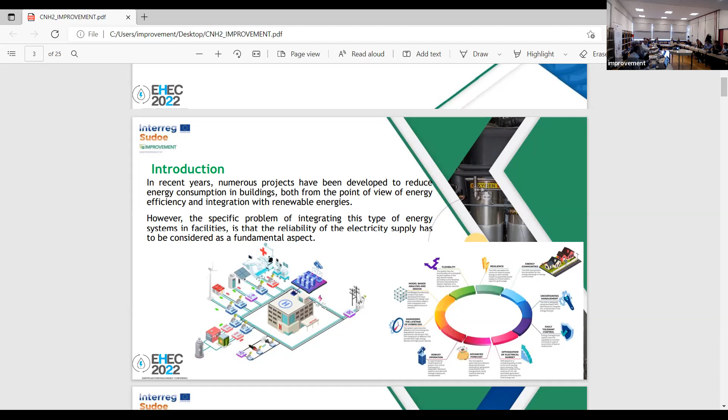We will have an introduction. In recent years there have been numerous projects because it's very important to reduce energy consumption in buildings. For this reason, Interreg Sudoe decided to have a call on how the consortium could have ideas in projects and collaboration projects in order to reduce and improve energy efficiency. This is the reason we have tried to solve with this project.

There are some places where we can find a lot of energy losses - for example, for health reasons in hospitals, in scientific and technology centers and universities, in defense conditions such as military installations, security and surveillance, in transport stations and airports. These are public kinds of buildings where we detected that we could find solutions with this project.

Why the solution? In order to reduce the consumption of energy and to improve efficiency, the main objective of the Improvement project is to convert public buildings into zero energy buildings.

By integrating renewable energy microgrids with combined heat, cooling, and power generation, with inverters, with active neutral control using hybrid energy storage systems like hydrogen, batteries, and ultracapacitors, that will ensure power quality and continuity of service to equipment sensitive to power quality disturbances - high-tech equipment - while increasing energy efficiency in this type of building.

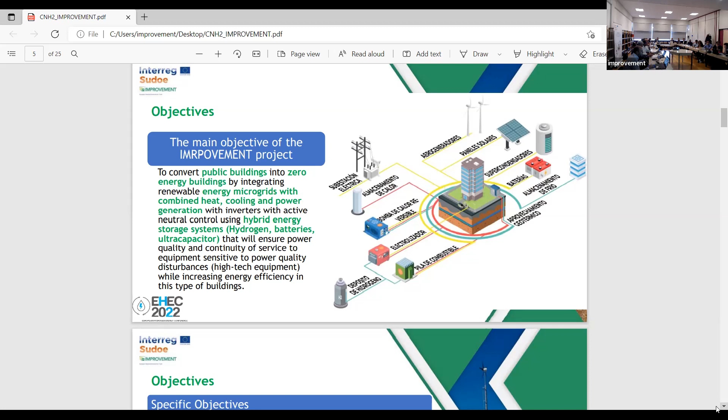For this reason, this is the specific objective: improve energy efficiency in public buildings with active and passive techniques, like here in this building, in this pilot plant, this building from LNEG in Lisbon.

Development of a resilient power control system of microgrids under high quality design criteria and continuity of supply. Development of an energy management system for renewable generation microgrids with a hybrid energy storage system, under criteria of minimum degradation, maximum efficiency, and priority in the use of renewable energy.

It is very important to use innovative technologies and techniques in pilot plants to demonstrate that the technology is possible and can achieve the goals that the government or the buildings need.

And also the energy management system, with a series of techniques - control predictive, in the development of algorithms, something like that - we can use it in order to optimize the use of energy in the buildings.

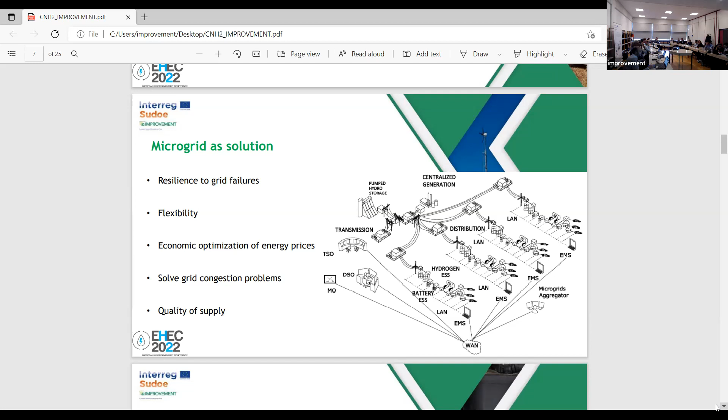There is a power management system - mainly in the Spanish pilot plant, we have used the inclusion of IoT sensors in power quality advanced metering infrastructure. We are going to develop this kind of sensor in this project and test it in the Spanish pilot plant.

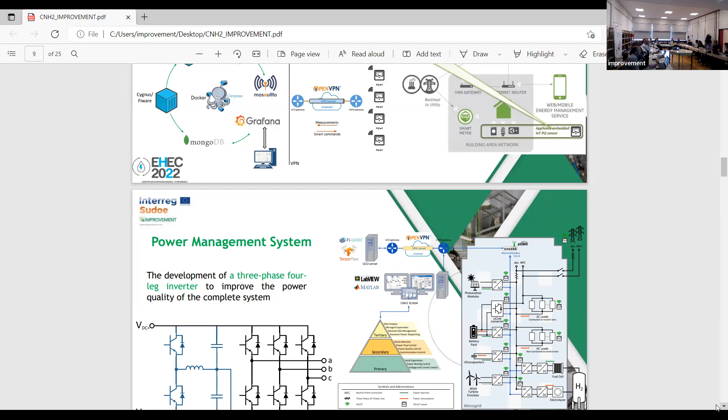Also, we are going to develop a three-phase four-leg inverter to improve power quality and complete the system. This is another technology we are going to test in the Spanish pilot.

Also, the energy management system - we are going to have different uses of this system in the Portuguese pilot and in the Spanish pilot. In the Portuguese pilot, we have solar collectors, a hot water tank, thermal energy storage, a heat pump, fan coil units, for specific rooms. The objective is to manage thermal energy and satisfy the thermal comfort constraints.

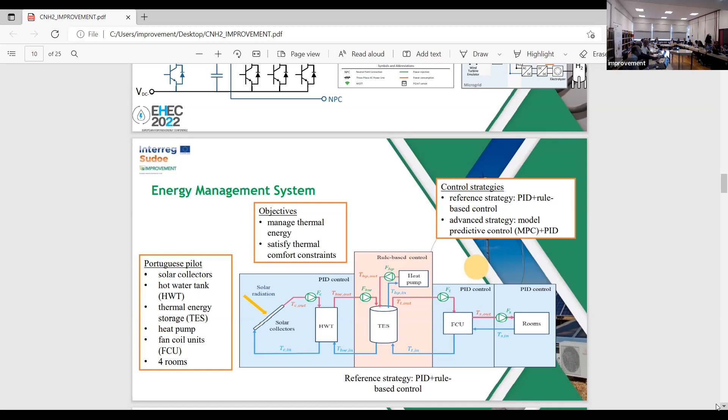And also they are going to use control strategies in order to achieve this solution, with PID plus rule-based control, or advanced strategy using model predictive control.

We are going to work on these algorithms in order to obtain a resilience-oriented schedule of the microgrids.

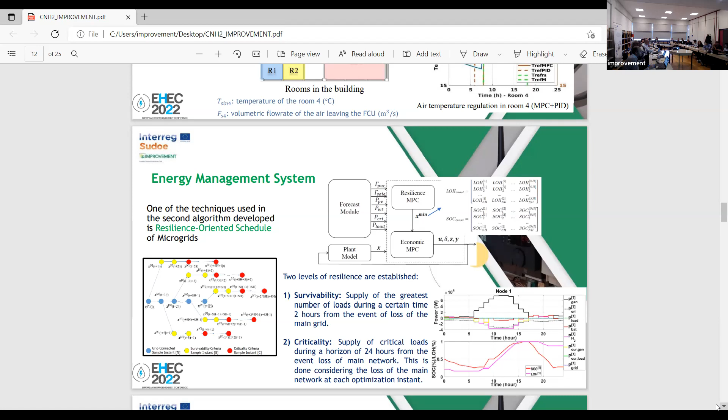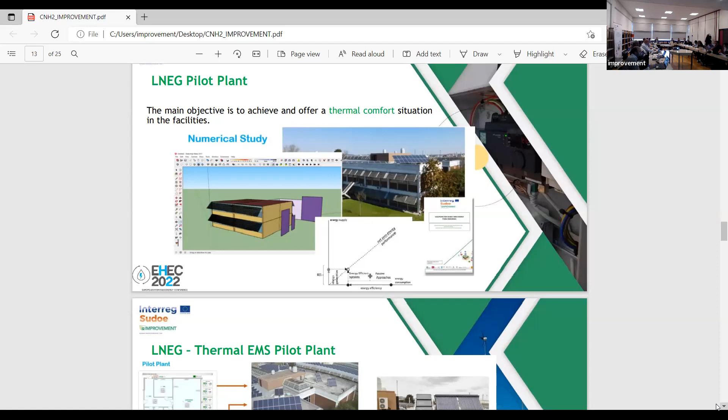In the LNEG pilot plant, the main objective is to achieve and offer a thermal comfort situation in facilities. Maybe after we are going to talk more about the pilot plant, but the idea this morning was working about the pilots that we have developed, and we are working in this project about the LNEG installation facilities. We have some images and pictures that you can see. If you want more information, you can see the Sudoe project web page.

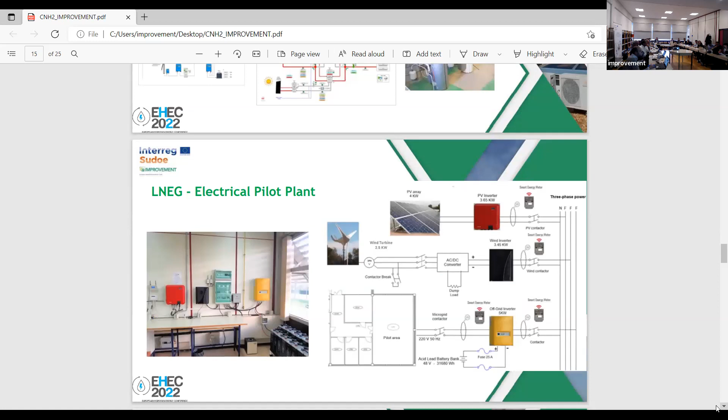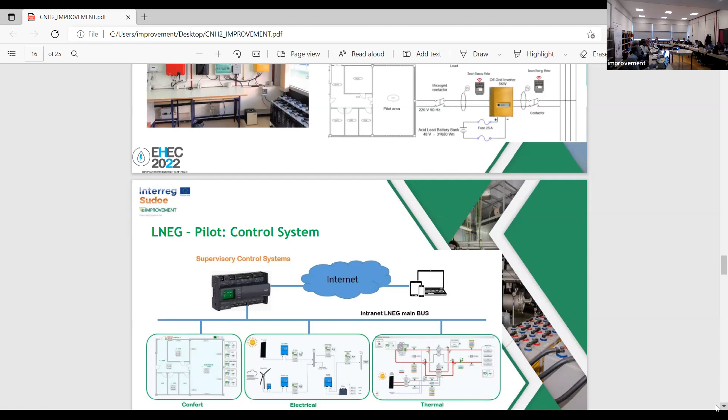I only want to show some information, since my colleagues know better than me about the technology, the techniques that they are using in the pilot plant, the electrical pilot plants, the control system they are using, and the results. We expect very relevant results by the end of the project to share with the public.

About the pilot plant in the Spanish National Hydrogen Center in Puertollano, Ciudad Real, Spain - we are using different technologies. We also have renewable energies. We have a small wind emulator, and we have hydrogen equipment to use it.

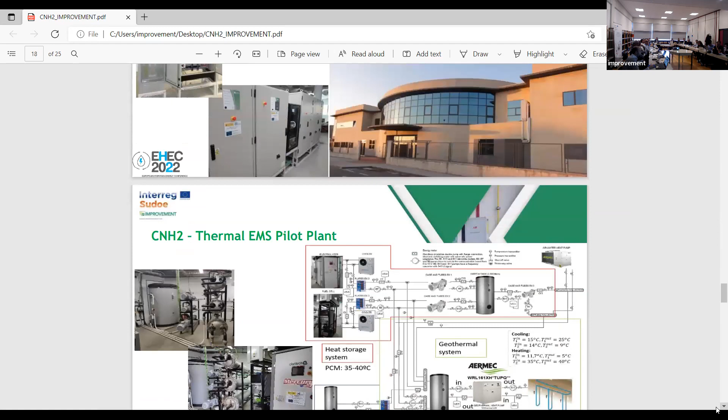We have a geothermal installation that lets us use the heat or cold from inside the earth, and we use this heat together with the residual heat from the electrolyzer and fuel cell equipment in the pilot plant, storing it in PCMs, phase change materials, in order to use this heat when we want to supply the thermal demands.

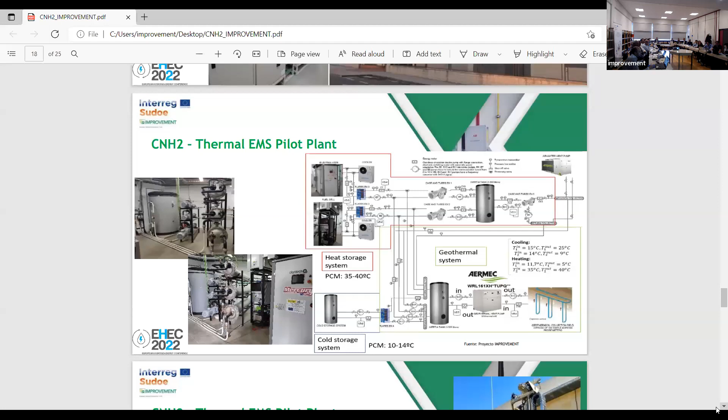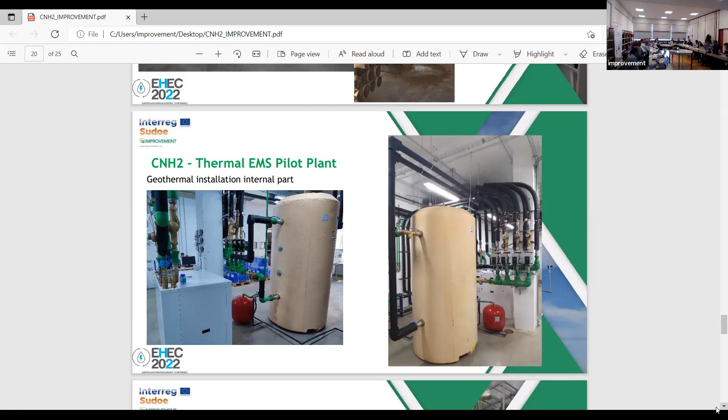In the building, we have the geothermal installation in the internal part. We can see the inertial tank and the geothermal pump that we use in order to operate the thermal system.

We have a cold energy storage system too, and there is the installation of the heat energy storage system. This is the electrolyzer, this is the fuel cell. You use the geothermal heat and join it with the residual heat of the electrolyzer and fuel cell equipment, and it goes into the tank to be stored with the PCMs, in order to reduce the power consumption of the CNH2 building.

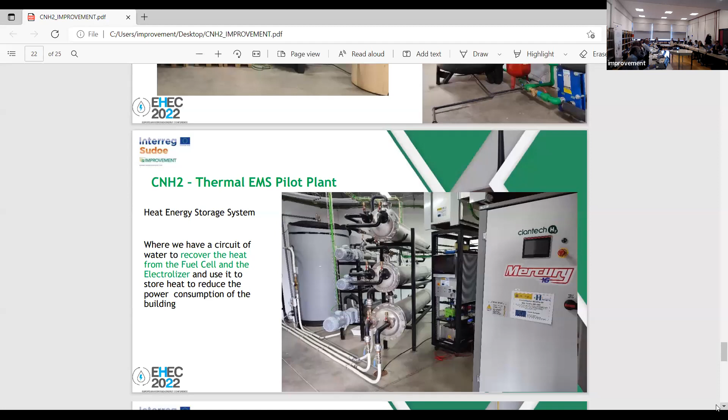We also have a hybrid storage system with batteries, supercapacitors, and hydrogen storage. We can use a microgrid laboratory in order to emulate and simulate this kind of energy storage, and use the pilot plant as a demonstrator that this technology is a fact, to verify the solutions we have.

And I think this is all. I try to go very quickly because what's important is the rest of the presentation that we can see.

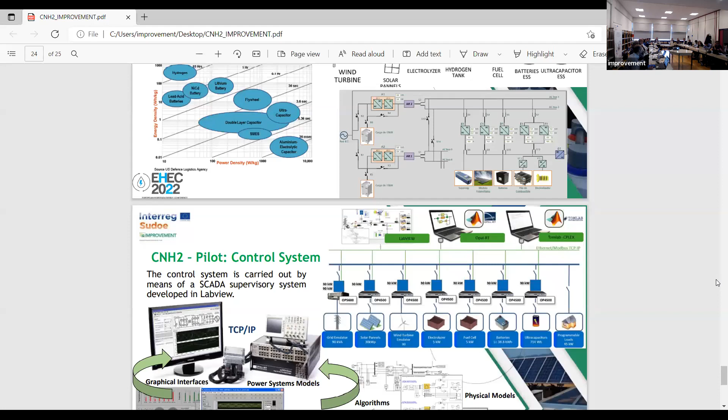Portugal is represented by LNEG and the Lisbon Technical Institute, and in France there are Perpignan University and ESMA. Spanish participation is from CNH2 as coordinator, Córdoba University, Castilla-La Mancha University, the Andalusian Energy Agency, and the Andalusian regional government is also involved in the project, because it's very important to receive the results directly.

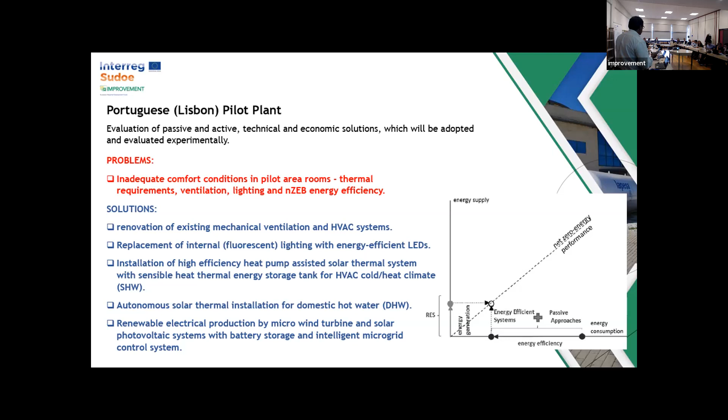Em termos de renovação de edifícios, nós fizemos uma monitorização em 2020, ainda durante o período de pandemia, de como estariam as medidas de temperatura sem renovação, e tivemos aqui a aplicação mais ou menos da ocupação que estamos previsto, aqui os gabinetes individuais, aqui a sala de reuniões e aqui a sala multiusos, de grande utilização. Tivemos aqui uma série de sensores que pusemos para fazer o levantamento inicial da monitorização.

Tivemos necessidade de identificar situações muito particulares que estavam a criar um desconforto e identificámos um ganho de energia solar, de irradiação bastante elevada, que aquecia e não permitia ter conforto. A resistência térmica aqui é muito menor que no resto do edifício, da envolvente, e tivemos também de pensar estratégias que pudessem ser adequadas, quer na zona sul, sudeste, quer na parte norte.

Este é realmente o trabalho que foi preciso fazer para renovar o edifício. O edifício tinha uma instalação muito antiga, não estava a funcionar, estava parada, e então foi necessário remover e voltar a instalar e moldar tetos falsos e instalar, em cada um dos espaços, um sistema adequado à sua utilização variável ou contínua, conforme a situação.

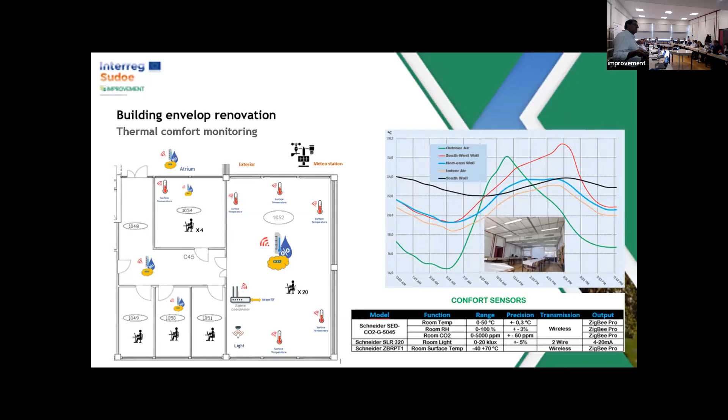Aqui temos os fancoils que foram utilizados, um deles, nesta renovação, e o outro fancoil, que podem ver aqui na sala. Aqui é a instalação na cobertura da componente de bomba de calor, que fornece calor e frio, como vai ser explicado mais tarde, e também da unidade de ventilação, que permite injetar ar novo e fazer a extração do ar viciado aqui da estação.

Esta é a parte mais prática da questão. Nós, inicialmente, usámos dois sistemas distintos pela capacidade de usar este edifício. Ele tinha, inicialmente, uma boa envolvente de isolamento e, portanto, não era necessário ter uma grande utilização destes sistemas de ar-condicionado, só apenas para correção de alturas das estações.

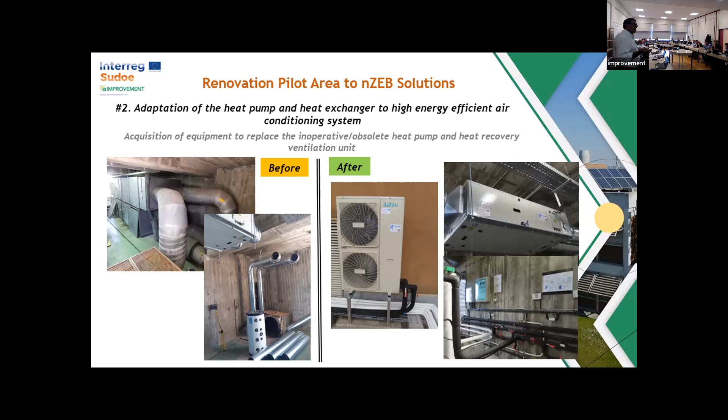A tudo isto foi necessário retirar equipamento e voltar a fazer a renovação. Esta é a parte mais trabalhosa, porque foi necessário desmontar esta sala completamente e voltá-la a montar com a iluminação adequada à utilização, em termos de economia, em termos de conforto e em termos de funcionalidade.

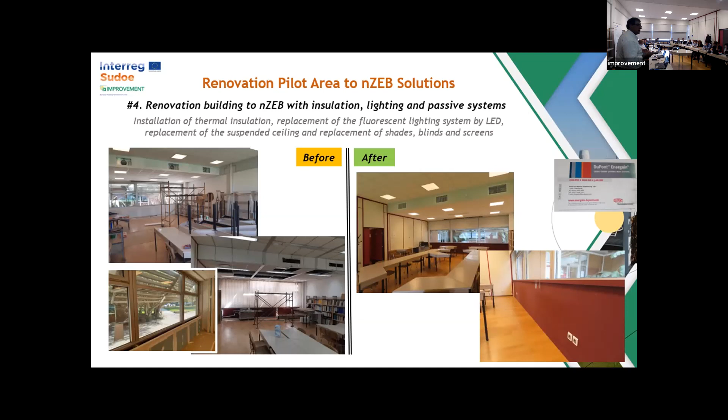Instalamos também aqui umas caixas de ar, que são estas que estão aqui com tom grená, ali do topo. Esta caixa de ar está vazia, aquela caixa de ar está cheia de PCMs, painéis que permitem ter outra intervenção em termos de isolamento, é o que aparece aqui. Podemos espreitar — eles estão a ser monitorizados com sensores que estão a medir temperaturas para poder fazer uma interação.

Temos um plano de testes que permite avaliar, em termos de equipamentos, em termos de conforto e em termos de soluções, em termos de clima externo, quais são as soluções que estamos a fazer para um edifício público. Temos informação que data de 2021, 2022 e 2019, que podemos usar.

A instalação não foi tão rápida como queríamos, e só no princípio deste ano é que começámos a tirar partido da instalação de renovação de ar, de climatização e de integração de energias renováveis para utilizar esta situação.

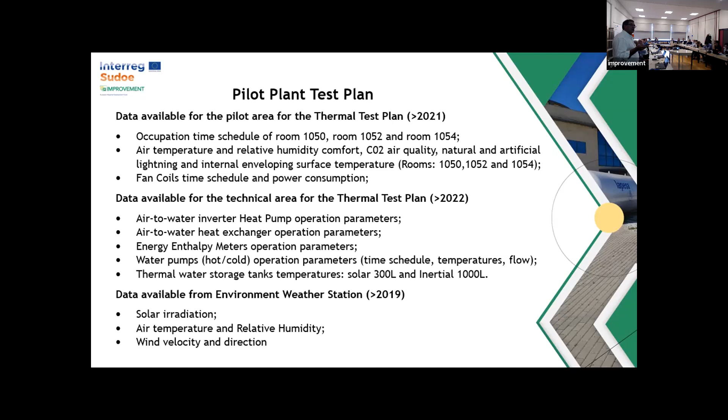No fundo, há aqui, por exemplo, uma situação interessante, que é termos medidores de entalpia, que permitem avaliar o balanço de energia utilizado no sistema, também sensores que estão a monitorizar todo o sistema de conforto. Por exemplo, estes que estão aqui, aqueles verdinhos que estão aí nas vossas costas, são sensores que estão a medir a temperatura e estão a emitir informação ali para aquele data center.

Aqui estão os vários sistemas de conforto que nós identificámos, e naturalmente a luz natural, a parte de utilização dos vários sensores de temperatura, umidade e concentração de CO2, para que o conforto fosse mais sensível e adequado às novas normas de utilização.

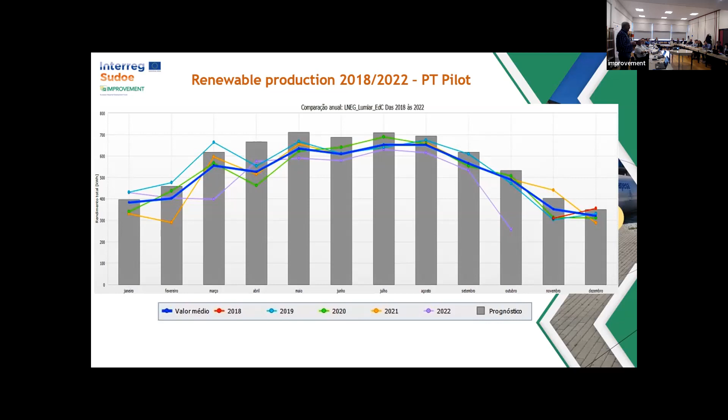Quando digo necessidades de consumo, inclui tomadas elétricas, iluminação, ventiloconvetores associados à climatização e também a bomba de calor. Já falarei mais à frente sobre o tipo de climatização que estamos a usar, também de origem renovável. A bomba de calor que estamos a usar representa cerca de metade da energia do consumo total que temos aqui nesta área.

Desde o início do projeto decidimos fazer uma aposta muito forte na parte da monitorização. Basicamente dividimos o projeto em 3 partes: a parte de conforto, a parte elétrica e a parte de climatização. Apesar de termos decidido sensorizar todas estas vertentes, também decidimos concentrar toda esta monitorização numa unidade única, um sistema de supervisão, uma unidade dedicada.

Este projeto foi desenvolvido em paralelo com a empresa Schneider. Foi um desafio que a empresa Schneider aceitou connosco, e digo desafio porque isto acabou por ser mesmo um desafio para a Schneider. A Schneider nunca tinha desenvolvido uma coisa tão específica assim, também foi aliciante para a equipe que se envolveu connosco, e acho que o trabalho foi francamente bom, um trabalho que deu frutos e dá frutos.

Ao fim e ao cabo, há algumas valências extremamente importantes. Para já, é agregar toda esta monitorização no elemento central, que apelidamos o sistema de supervisão. Este sistema tem uma capacidade extremamente interessante: incorpora inteiramente um servidor web, funciona também como um web server, e permite, através de um conjunto de páginas especialmente desenvolvidas, um acesso rápido às várias vertentes do projeto.

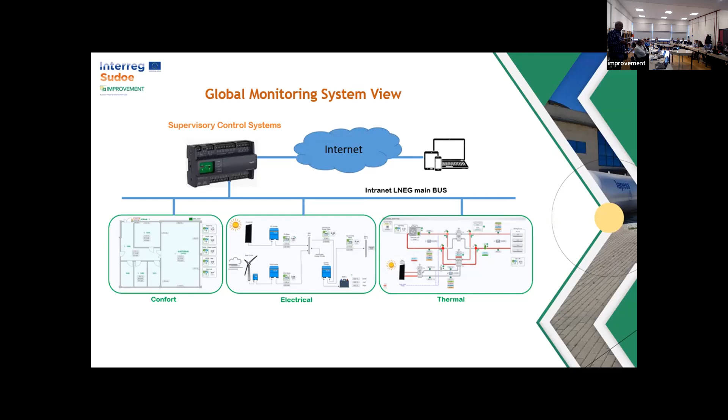Relativamente à parte de conforto, tivemos a preocupação de fazer uma monitorização mais ou menos exaustiva. Basicamente, como o meu colega David falou, temos instalado um conjunto de sensores de superfície. Estes sensores foram extremamente importantes numa primeira fase, porque foi possível, através deles, fazer uma caracterização térmica do comportamento do edifício, tirar conclusões e partir para as ações necessárias.

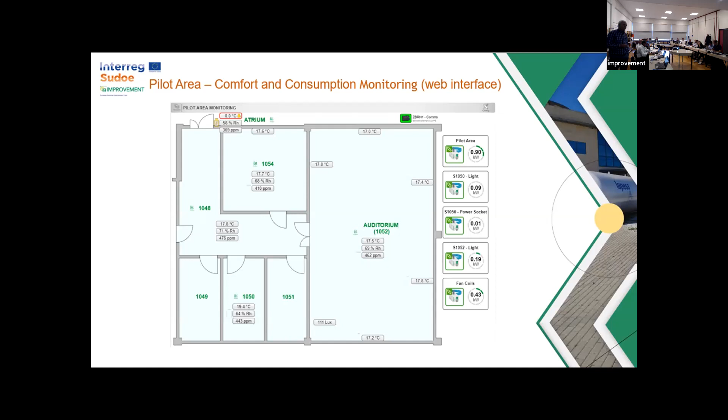E portanto, isto é a parte, basicamente, muito embora tenha aqui uma parte de monitorização de consumos, basicamente isto é a interface respeitando aqui à parte de conforto.

Em relação à parte de energia, nós também estamos a monitorizar qual é a contribuição fotovoltaica e eólica. Estamos aqui a monitorizar qual é a energia que está a ser injetada nesta microrrede. Mais à frente irei falar um bocadinho sobre isto.

Toda a parte elétrica foi renovada aqui desta zona. Era a nossa intenção criar aqui uma chamada ilha de energia e, portanto, todo este espaço ser alimentado a partir de um ponto esse cuja a injeção de energia podia ser ou por fonte renovável, que é o caso, é o que está a ser, ou pela rede pública.

Portanto, ao fim e ao cabo, isto aqui acaba por ser a quantidade de energia que está a ser injetada na microgrid, portanto, na instalação elétrica aqui desta área piloto.

Esta injeção de energia é assegurada por um inversor híbrido. Portanto, este inversor tem agregado a ele uma unidade de backup. Temos ali um conjunto de baterias ácido chumbo que, em caso de falha de produção de energia por parte de origem renovável ou pela rede pública, as baterias estarão lá para continuar a garantir o fornecimento de energia necessário para o espaço poder trabalhar.

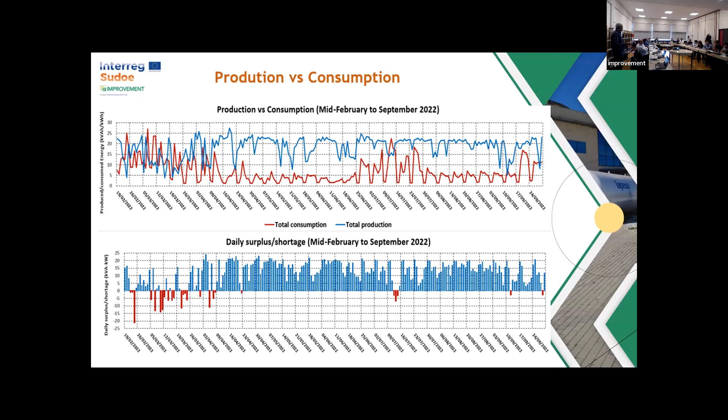E nesse dia, efetivamente, a bomba não parou de trabalhar e houve aqui um desfasamento entre o consumo e a produção. Isto é uma característica que nos leva a pensar noutras soluções, mais à frente irei falar sobre elas. Mas chegamos à conclusão que realmente temos aqui produção disponível face ao consumo e isso está assegurado. Quando isso não é necessário, há sempre as baterias para fornecer alguma energia adicional em caso dessa necessidade.

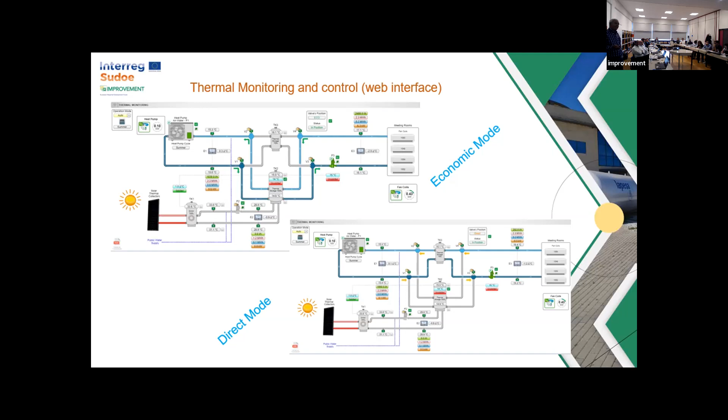Relativamente aqui à parte elétrica, como eu disse, houve aqui um conjunto de medidas que foram tomadas, nomeadamente foram criados aqui novos circuitos elétricos, e foi criada, como eu já referi há pouco, uma chamada microgrid. Portanto, a ideia era isolar este espaço eletricamente de toda a infraestrutura elétrica do edifício. E, portanto, autonomizá-lo o mais possível para que nós possamos ter controle sobre toda esta energia que por aqui circula. Isso foi uma das coisas. Portanto, neste momento temos aqui uma ilha de energia, uma microgrid a funcionar.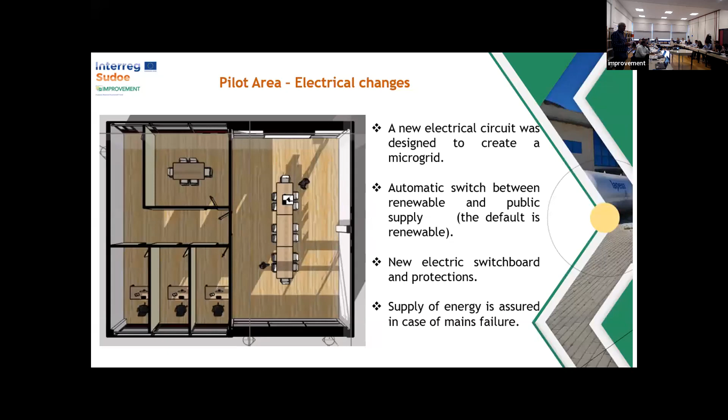Obviamente, nós também desenvolvemos aqui um sistema automático que vai permitir que o fornecimento de energia a esta área piloto seja sempre assegurado. Portanto, quando há falha de energias renováveis, ou há uma avaria, ou há uma manutenção, ou há uma coisa qualquer, há ali os contactores que caem automaticamente, passam para a rede pública e passa a ser a rede pública a alimentar todo este espaço. Obviamente, todo o circuito de proteções teve que ser implementado de novo e também, obviamente, está previsto, como eu disse há pouco, o backup por baterias de ácido de chumbo para, sempre que seja necessário, elas lá estarão para nos ajudar.

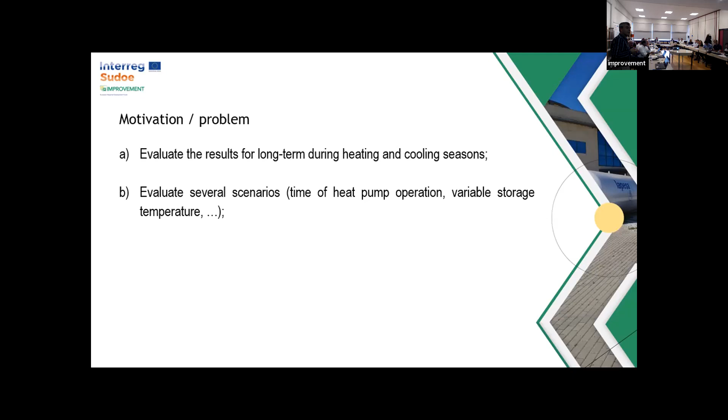O modelo permite também avaliar vários cenários. Nós poderemos ter cenários em que a bomba de calor está a trabalhar durante alguns períodos do tempo em que temos excesso de produção de energia elétrica de origem renovável e obrigarmos a bomba de calor a trabalhar nesses períodos, nessa escala de tempo. Para além disso, também podemos variar a temperatura do tanque de armazenamento e armazenar calor a uma temperatura mais alta quando temos excesso de produção de energia renovável. Isto pode ser tudo avaliado facilmente através da simulação.

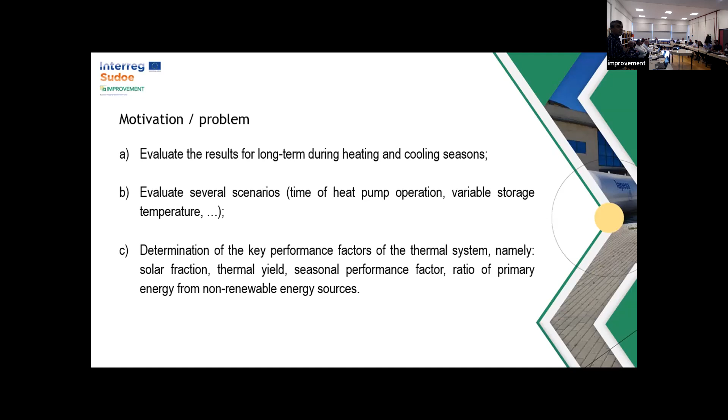A simulação também nos permite calcular os fatores de desempenho do sistema, como sejam, o que já foi falado, a fração solar, portanto, a fração de energia que nós temos para aquecimento do espaço, que provém do solar, face à energia que usamos na bomba de calor. E depois também estimar o comportamento térmico da bomba de calor a longo prazo, através do seu SPF, ou do SEER, que é para o caso do arrefecimento.

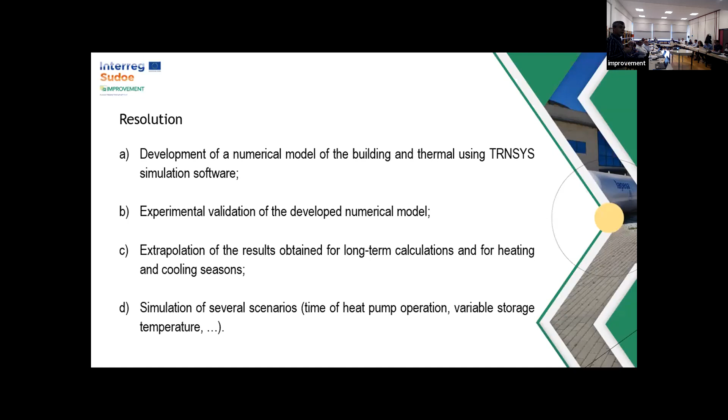Portanto, para resolver este problema que vos falei no slide anterior, nós vamos fazer uma modelação usando o programa TRNSYS, que é um programa de simulação de sistemas térmicos, e vamos validar esse modelo com dias específicos de dados experimentais. Depois de termos um modelo validado com dados experimentais, vamos então fazer o cálculo a longo prazo, avaliar os vários cenários para o funcionamento da bomba de calor e calcular os parâmetros de comportamento térmico do sistema, a fração solar e o COP sazonal ou o SPF.

Como é que foi tratado o facto da radiação que incide nas paredes, nas fachadas? A radiação foi simulada através de uma temperatura fictícia denominada temperatura ar-sol, que é muito usada na simulação de edifícios. O que pretendemos fazer no próximo passo é, em vez de fazer a simulação da sala em MATLAB, fazê-lo através do TRNSYS, do Type 56, através de uma simulação detalhada que permite ter várias zonas e fazer uma simulação mais realista do espaço a analisar.

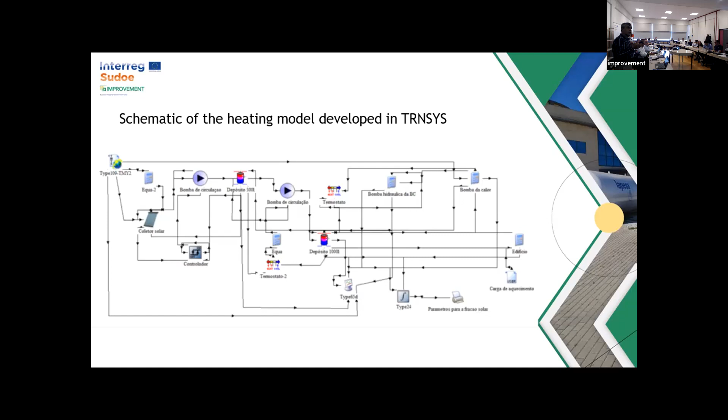O caso de arrefecimento, portanto, não temos o sistema solar térmico e é bastante mais simplificado, uma vez que não temos essa componente.

No fundo, nós temos a bomba de calor modelada através de duas equações, 2 mais 2, portanto 2 para aquecimento e 2 para arrefecimento, em que temos a potência térmica dela em função das temperaturas, temperatura exterior e temperatura da água, e temos também o consumo dela, a potência elétrica que ela consome, em função dessas duas temperaturas.

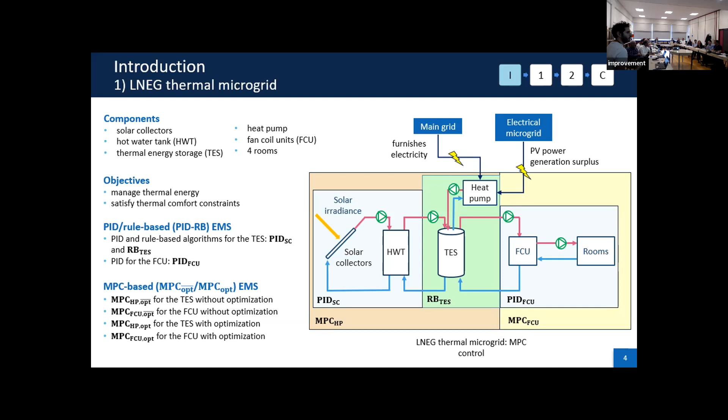For our part, we proposed model predictive control, which we'll explain just after, with or without optimization, that enables us to improve the result economically or with thermal comfort constraints. So what is the model predictive control?

It is a tool to follow a reference trajectory. The MPC controller determines from the future state of the system, so we anticipate what will happen to know what will be the best control we apply, based on the prediction. Once we have those predictions, the MPC controller applies the best control input at the current state of the system.

It's very useful in this case because for the solar collectors or the PV panels, this is an intermittent resource with the sun, so we expect some intermittencies. This can be a useful tool, and we need a model that we modelized in MATLAB and validated with the data LNEG sent us. We have 1 or 2 degrees difference with the values. So our main question here is whether the MPC will provide better results than the existing algorithm on the project.

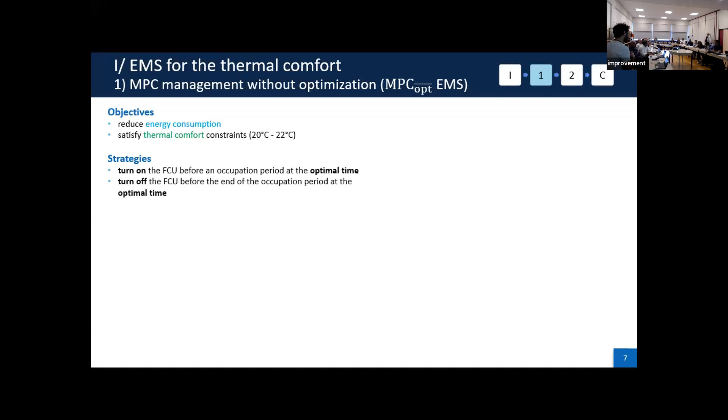So I will first talk about the thermal comfort. The objectives are to reduce energy consumption and satisfy thermal comfort, letting the temperature be between 20 and 22 degrees. We want to predict the moment we turn on the fan coil unit before an occupancy period.

The occupancy period will begin from 8 a.m. to 6 p.m. We want to anticipate the moment we heat the room, so the comfort is reached when people arrive, and we want to stop the fan coil unit before people are leaving, letting the temperature decrease normally inside the room.

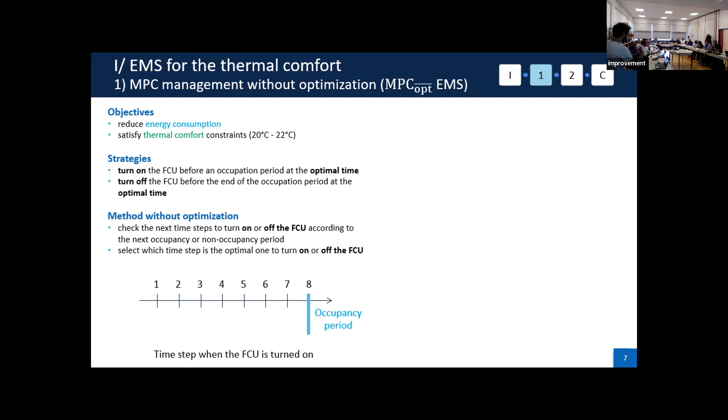We check at different hours if we activate or not the fan coil unit to see, for example, in a certain room, if the temperature of 20 degrees is reached. So we check at different time steps to see if we manage to reach the temperature in time, and we anticipate this.

Here, for example, we have moved our forecast horizon to activate the fan coil unit, and there is a time step where we can't reach the temperature of 20 degrees in time. So we go back with the algorithm to check, and with this time step, the 6th, we have succeeded in heating the room at the correct time.

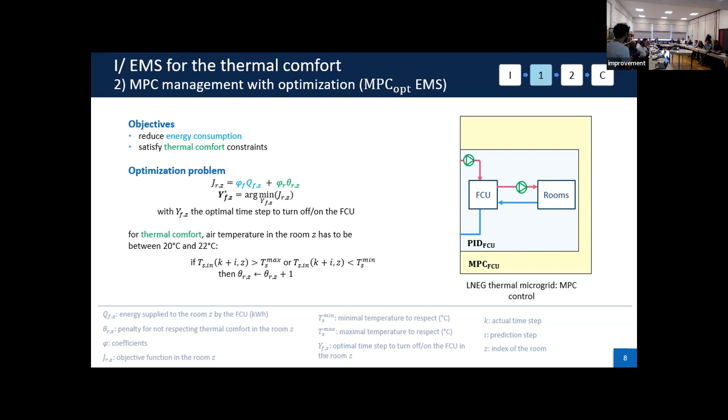So we also have an MPC with optimization this time. To be simple, we have an objective function that we want to minimize, and thanks to that, we determine the best moment to activate or deactivate the fan coil units.

Now we can compare the strategies. Basically, with or without optimization, for this case the problem wasn't very complex, so both MPC approaches got the same result.

So we compare the different results in spring and during winter. For the time of use, the fan coil units are used less in the room because we anticipate the moment to stop them, and we also consume less energy because we don't need to leave them turned on always.

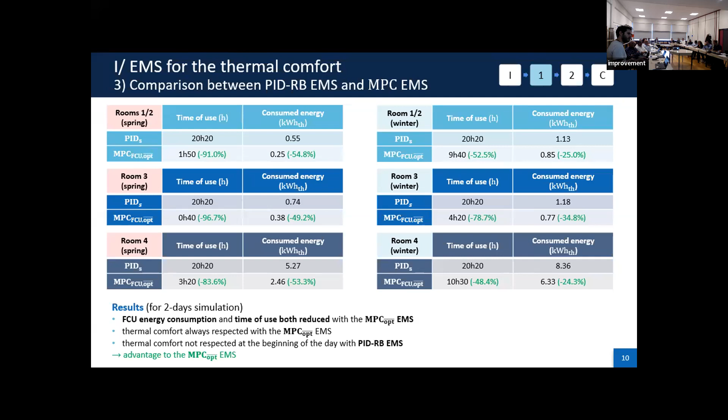But regarding all those results, we have an advantage for the model predictive control. If we look again at the energy comparing different seasons and different rooms, we can check that the MPC got better results, exactly the same whether we have optimization or not. But regarding computation time, the MPC without optimization is much faster than the MPC with optimization, so that leads us to an advantage for the MPC without optimization.

Furthermore, the comfort temperature is always satisfied during the occupation period, while it isn't always the case with the PID control. So now with the EMS for thermal resources, I will first present an MPC without optimization, where we want to reduce economical cost and take advantage of the photovoltaic power generation surplus, like I talked before. The strategy is a little bit the same as with the room.

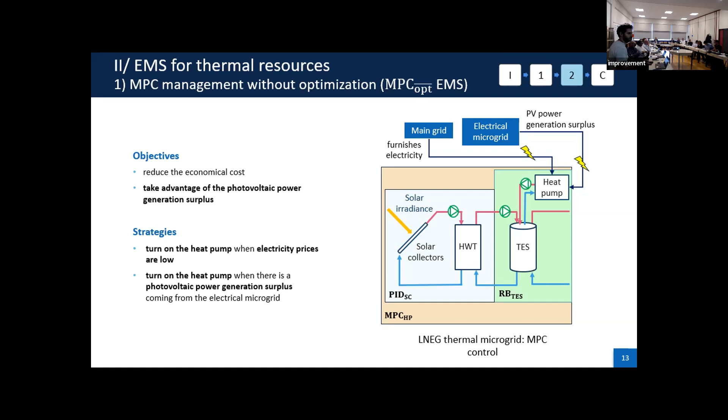So we want to turn on the heat pump at an optimal time, and we do it when electricity prices are low, or when we detect a generation power surplus from the photovoltaic farm. For the algorithm, we first wonder if we are in an occupancy period or not, and we wonder if the heat will be sufficient during the occupation period to support the fan coil units. If this is the case, we don't activate the heat pump for our prediction horizon in the future.

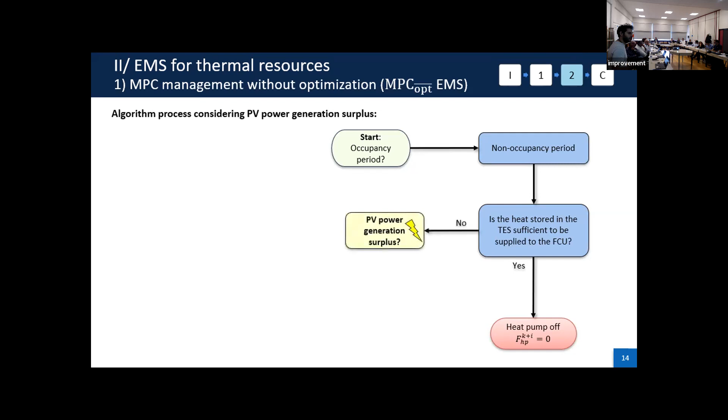Otherwise, we detect if there is a generation surplus that will happen. If a generation surplus happens in the future, we activate the heat pump during this time. Or if there isn't any generation power surplus, we check the different time steps in the future where electricity prices are low.

So in the occupation period, finally, these are the same questions. We check during the occupancy period if the heat will be sufficient in the time step to support the fan coil units. With the objective function, we still have an objective function to minimize, and thanks to that, we will know at which time step we have to use the heat pump in the future.

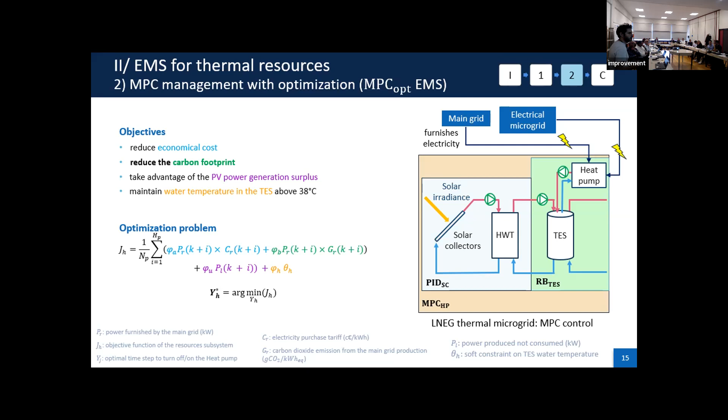So the objectives are also to reduce economic cost, and we are trying to reduce the carbon footprint as well, as in the main grid, electricity production emits carbon dioxide emissions, and we can know that in real time and anticipate it in the future. This is a step that will be improved. We also want to maintain the water temperature in the tank above 38 degrees.

So we have some calculations. We want to minimize the power that we lost. In the objective function, we can give it as an input. So we minimize the power lost after we use the heat pump and the photovoltaic generation surplus. And there are still some terms to prevent the MPC from letting the temperature decrease

But right now, the rule-based algorithm got better results economically, but it didn't satisfy the temperature constraint that we have of 38 degrees. But the MPC without optimization quite successfully respects that, and the MPC with optimization totally respects it.

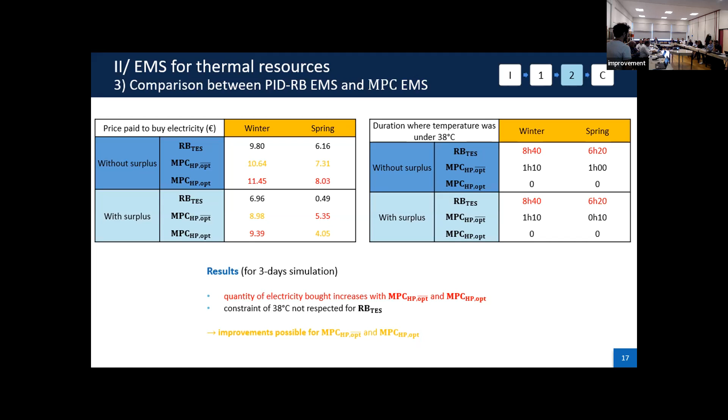So I think there are improvements that are possible for this part, and I did work on it yesterday and this morning, so I hope soon I will present those results.

Computation time is very low for rule-based compared to the PID control, but it's a little bit higher with the MPC without optimization, and very high with optimization. So given this information, PID rule-based is easy to implement.

MPC without optimization is less easy to implement, but still possible. And with optimization, this is the last one, it isn't very easy to implement because we have to buy a calculation server, and this can be very costly for the project.

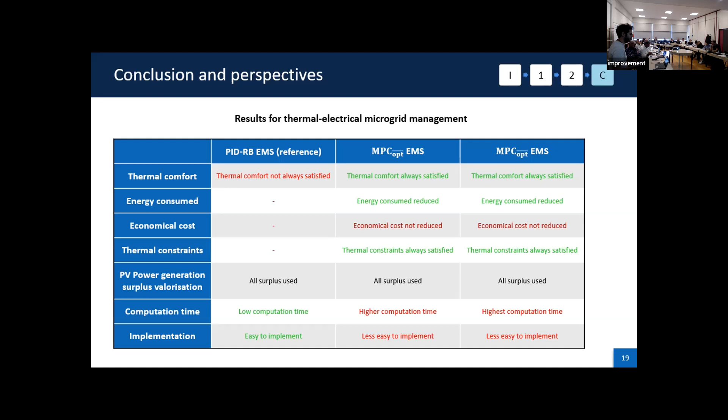So to conclude, our MPC got better results regarding thermal comfort, and for the storage part, we see that even if we pay more for electricity, the constraints are always satisfied. So it's a little bit balanced, but I have to work on this part. We still need to make adjustments to make it very clear that the MPC is better.

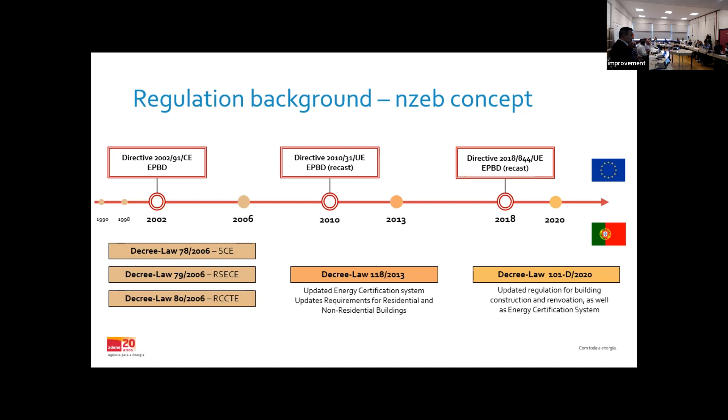The concept behind those stricter regulations, not only nZEB, is first to reduce the energy consumption of buildings, either through improved building insulation or better windows. So the improvement of the building envelope as a whole, in order to reduce energy consumption, and gradually to introduce as a mandatory requirement the use of renewable energy in those buildings.

So in 2006, it became mandatory for residential buildings to have solar thermal panels for each new house, and stricter requirements for the building envelope were added. The centimeters of wall and roof insulation became bigger and bigger as the regulation evolved.

Later on, apart from those stricter requirements for building envelope and windows, we also have the introduction of a mandatory share of renewable energy per building, and topics regarding electromobility as well, giving an overview analysis of the building promoting nZEB standards, meaning trying to achieve at least the amount of energy from renewable sources that compensates, or at least makes the break-even point, regarding energy consumption.

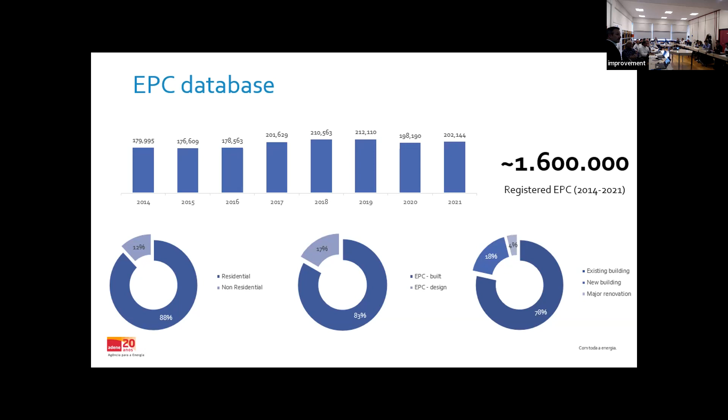Building renovations that overcome 25% of the building cost should have an EPC, and with that, stricter requirements also apply to that same building. But simple renovations, not major ones, are not accounted for within the system, and there is no information whatsoever regarding those single renovations.

The breakdown in terms of energy labels, we find some relatively interesting results in terms of the better labels, let's say A, B, and B minus. However, they do account for those requirements for new buildings, and they tend to have a different approach toward this Gauss distribution of values. They have a small influence in terms of those better labels.

Nonetheless, the building stock in Portugal tends to be less efficient, because almost two-thirds of the building stock in Portugal was built before we had any regulation in terms of energy performance and energy requirements. So this is a consequence of the lack of regulations that we had throughout the building decades, let's say.

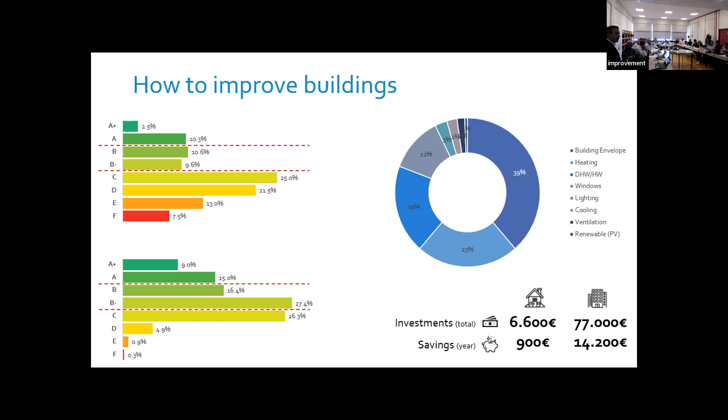If we have a small view just regarding public buildings, we found some slightly over 17,000 EPCs for public buildings, and of course the number, that big bar over there in 2017, is directly related to a specific call that existed for public buildings.

Buildings tend to have the EPC when they need it, not when they are obliged to, and that's why we have almost like a fixed line throughout the years, apart from that specific year, which is the normal rating of the EPCs issued per year. It's a direct linkage to specific calls that existed.

That specific call in 2017 was for public housing, and we had a lot of EPCs issued for public buildings, although they are residential buildings, which is public housing, which was targeted in that call.

Again, the same breakdown. We found some relatively different numbers for residential and non-residential. We have a better number in terms of non-residential buildings, I counted 30% here. The same numbers either for the design stage or the build stage, with relatively small differences, but a better share of major renovations for public buildings, again directly related to specific calls where the EPC was a mandatory document for that evaluation.

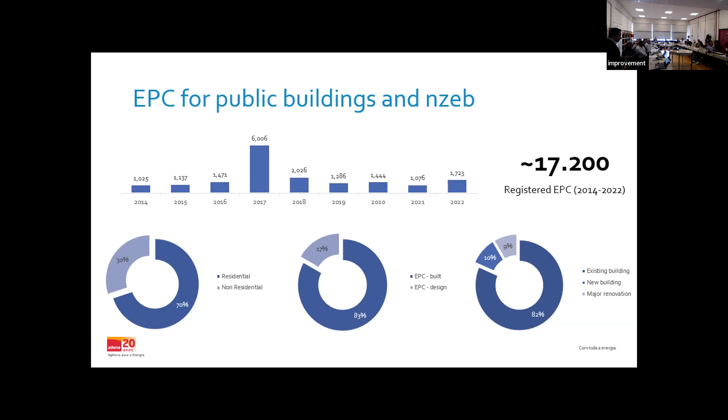Before going into nZEB, I don't have the slide here, but I'm taking advantage of the additional 10 minutes from other colleagues just to highlight a specific aspect.

Although it was mandatory for public buildings to be accounted as nZEB standards from 2019, that regulation was revoked with the later publishing of the updated version. I'm not saying that, but there was a mistake on the formula to calculate nZEBs within 2019.

So we had a revised regulation. That mistake was corrected, and since 1st of July 2021, all buildings must be nZEB, and the correct formula existed on regulation. So no mistake there in terms of the calculation.

That said, the numbers that I have here for nZEB standards are since 1st of July 2021, and there's a gray area between 2019 to 2021 for nZEB. That's a mistake that we are trying to correct and try to get some figures of the EPCs that were issued in that time frame.

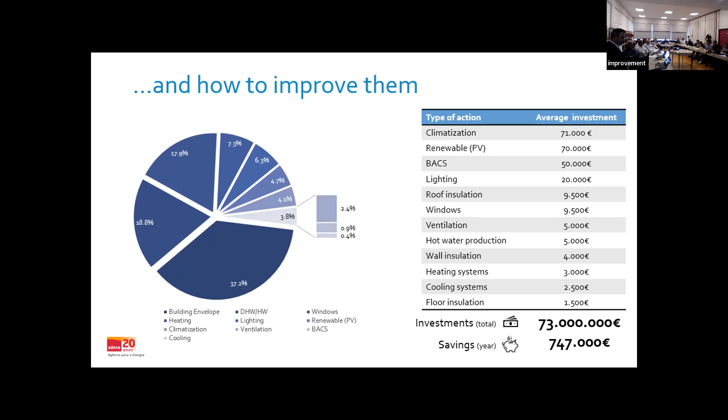With that in mind, every European country had this recovery and resilience plan - a lot of money targeted and designed to support building renovation. There's a climate transition axis within our recovery and resilience plan, which accounted for almost 610 million euros for building renovation, and 240 million euros are for public buildings.

There was a specific call for improvement of buildings, in this case for central bodies. It has a limit of 5 million euros per application, and it started with a total amount of 40 million euros, which was upgraded from 40 to 200 million euros, basically covering all the expected amount of money foreseen in that plan.

So the call is currently closed, in September if I recall. They are still evaluating, but at least a lot of money is effectively put into practice for buildings to be renovated. And because it also has to achieve a minimum amount of energy savings in order for the European Commission to provide money, it is expected that all these buildings would save at least 30% in terms of primary energy consumption - that's the minimum requirement for these calls to give money.

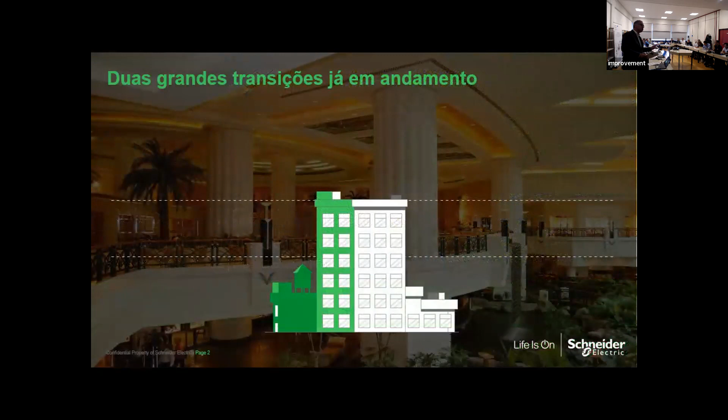About efficiency - that's not only a problem of the facility manager, as you know, and it's not only a problem of the technical maintenance of the building. The concern with efficiency has to start very early, from scratch, in the project. So this presentation tries to show two very big transitions we are still living through.

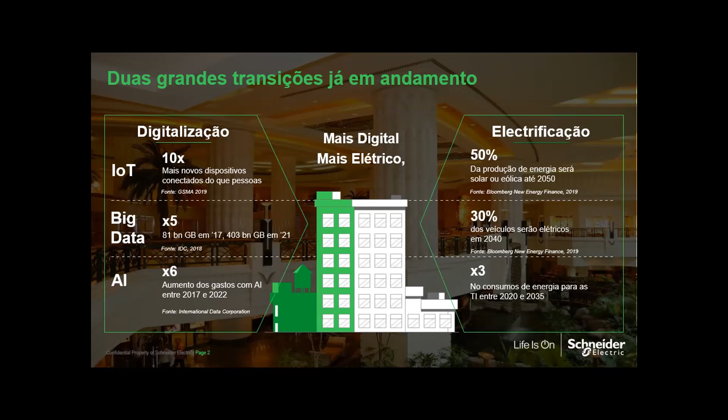All of us, between the office, our homes, and transport, we spend something like 70, 80, 90% of our lives inside closed spaces. We are talking about offices, of course, but we have to understand that we live 90% of our lives inside spaces, with artificial lighting, with mechanical systems to control climate - HVAC systems. So we have to be very concerned with this kind of management, of course.

The potential for being efficient in buildings is huge, much more than in the industry. The industry, not only in Portugal but in Europe for sure, did this path very early, in the 50s and 60s of the last century. The potential to transform, the potential to be efficient in the office building, is very huge.

Offices represent something like 40% of the carbon dioxide into the atmosphere, and represent something like 30% of energy waste. We have to have this conscience that 30% on average of the consumption of a building is thrown away - it's energy that consumes, that is paid for, but is not transformed into useful work. Therefore, buildings are even more digital and electrical. So far, nothing new - we understand that our lives are even more digital and electrical in our habits.

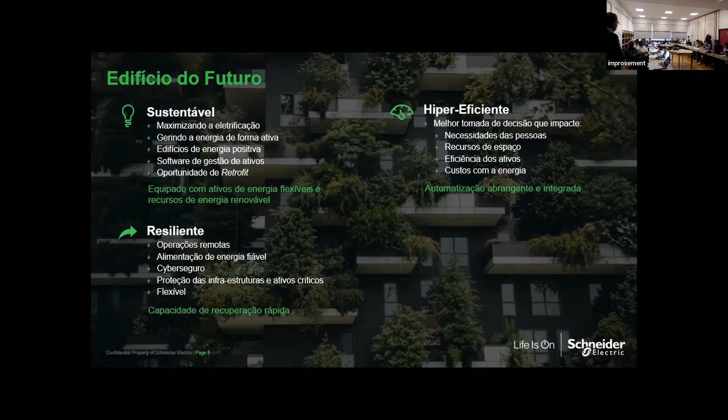Resilience. In the last 2-3 years, we said resilience more times than in the 20 years in the past. We are talking about the resistance to external changes. What is it to be resilient? Resilient is to get back to the same point. We can use the opportunity of being resilient to innovate if you want. But resilience, as a definition, says that due to external conditions, the system falls down. We have some problems with electrical distribution, for instance, in an office. But the resilience we are talking about is how able am I to recover a system that was down.

This is the first pillar I want to talk about: we have to be concerned with the occupants. This is the most important pillar of this discussion, to be people-centric. All the decisions we make must have these occupants at the center. As I referred, the experience of the occupants, the safety, the healthy devices, the comfort inside the building, it is very important for their development, for their performance.

We are now switching for the second part. I said that I have an example, a good practice, and I choose this one. This is a real case, of course. This is our headquarters in Singapore.

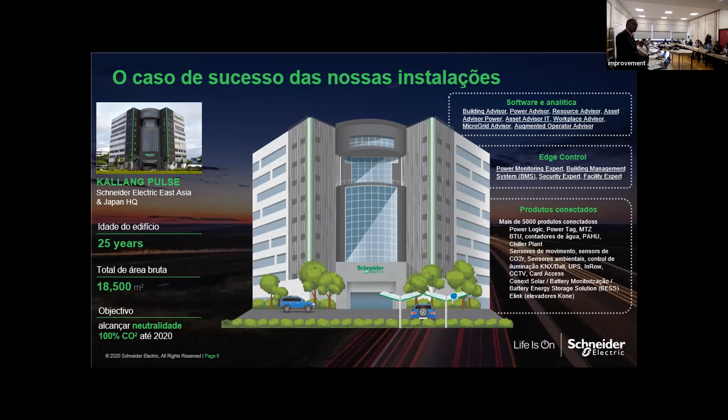An example of the intervention on the rooftop: solar panels, new windows, new panel windows to ensure the isolation of the building. New chiller. Why do I refer to chiller? The chiller is one of the most expensive devices you can buy for a facility. It is very important to choose wisely. The chiller is also one of the biggest consumers of energy, so we have to stop to think and choose the best chiller.

This case with variable speed drive, of course, with high-tech technology. This is also as important as a good insulation, the solar panels, and some other measures we take.

Outside the building, outside the envelope, but also inside the campus, of course, more solar panels close to the parking, connected with the storage system to store the energy, of course, and the night light that is necessary to ensure security of the perimeter of the area.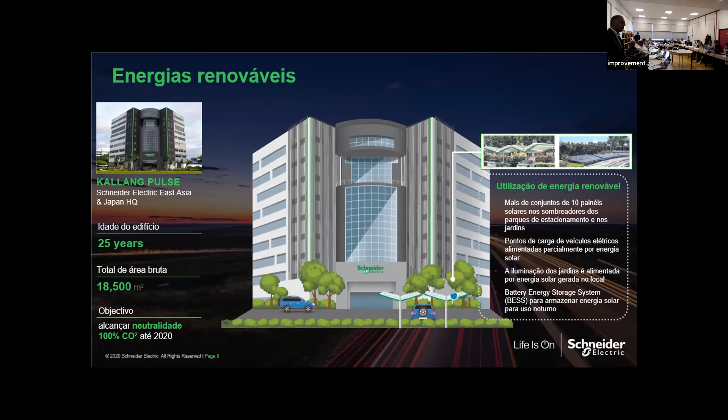Very important: I said efficiency and occupants are together. We are talking about room management, a concept, a vision of the smart office that all offices should be. We have to adjust the lighting, the temperature, all the systems depending on the occupation of the room. If there are no persons in that room or just a few, we have to adjust the set points.

That doesn't mean shutting down the air conditioning. Sometimes that's not a very good decision. The chiller must work stably all around the day. It is not wise to shut down all the air conditioning for 1 hour just because it's lunchtime. Maybe it's better to adjust the set point because nobody, or few persons, are there.

The same with the lighting, to adjust the artificial lighting depending on the natural lighting that comes from outside. This is very important, to analyze the occupancy of the room, of the space, and then be efficient in managing the infrastructure.

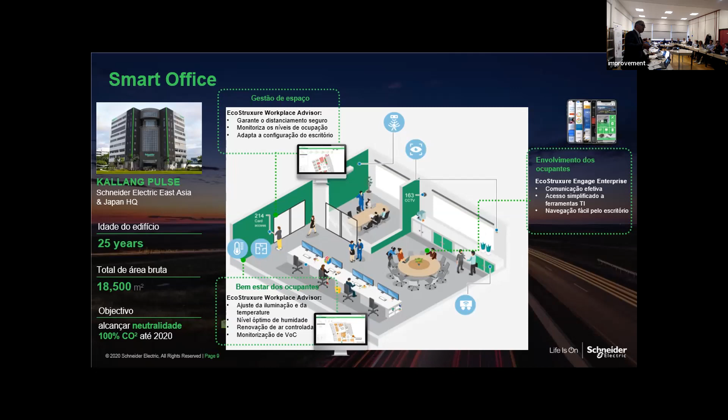This is very important, to offer tools to the occupants. Sometimes we all like, here in this room I am sure of that, to check: it's so hot in here, what's the temperature? Let me see the device. So, of course, 30 degrees. This kind of notion, this kind of information is very important for the occupants.

Today, we can offer something like this. Everybody, most of course, has a smartphone in their pocket. There are applications, some web services, that enable the occupants to access this kind of information, not only environmental, the lighting, the temperature, and so on, but also other functions that the companies, that the offices, like to offer. That simplifies the process.

To ask for meals, to call the help desk, to ask a question, to request help, to submit a maintenance request, and so on—this is the new display we have, replacing what we had in the past on the wall.

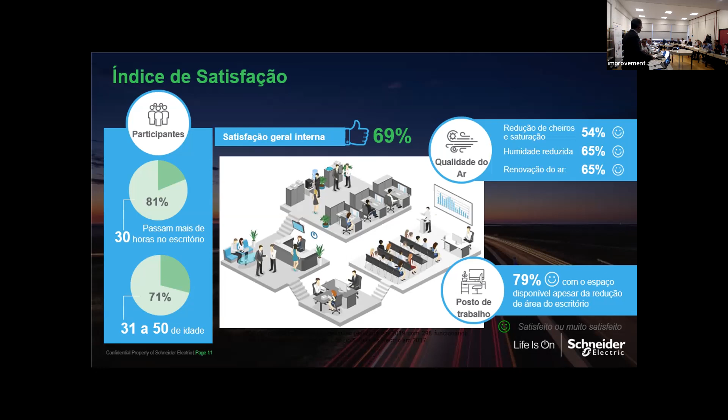General satisfaction: most of the occupants appreciate the measures that were implemented. This is the last slide—okay, I will explain in the following.

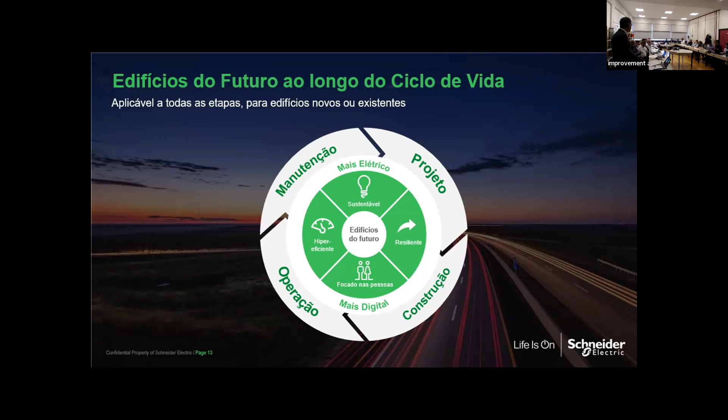We have, of course, the capex phase and then the opex phase. You can divide this into two parts, but it is very important so you can ensure you are sustainable, resilient, efficient, and most important, people-centric. People are at the center of the decisions.